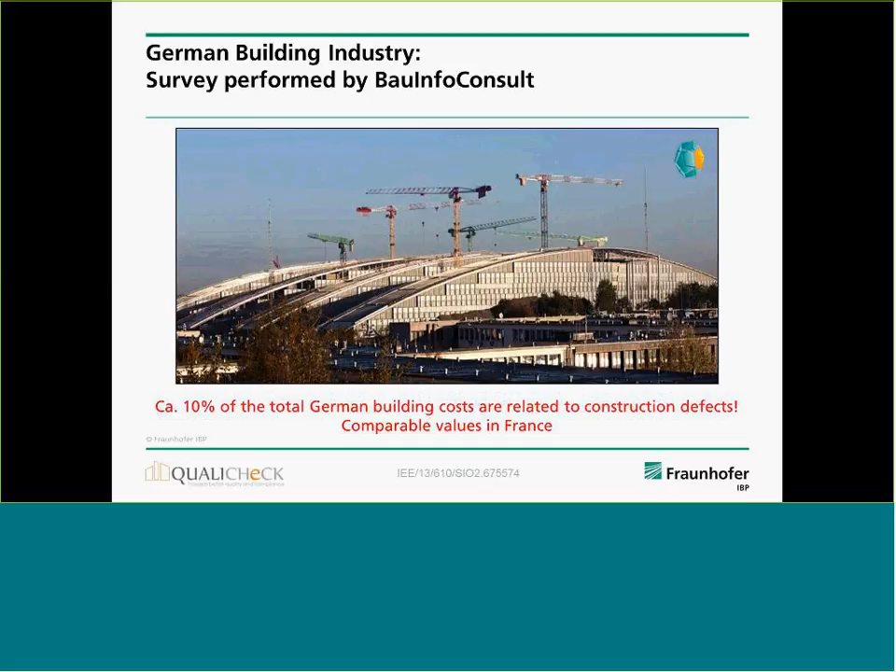This book, this collection of all this information, is structured in a way that we have a short chapter analyzing the reasons for good or poor quality, and then we have the philosophy that Peter just described, how to organize these activities in the countries.

And then we have three parts. One part is technical procedures in the back, then we have the legal procedures, and the third one is handling the compliance. I will, in this presentation, concentrate on part one, the technical procedures.

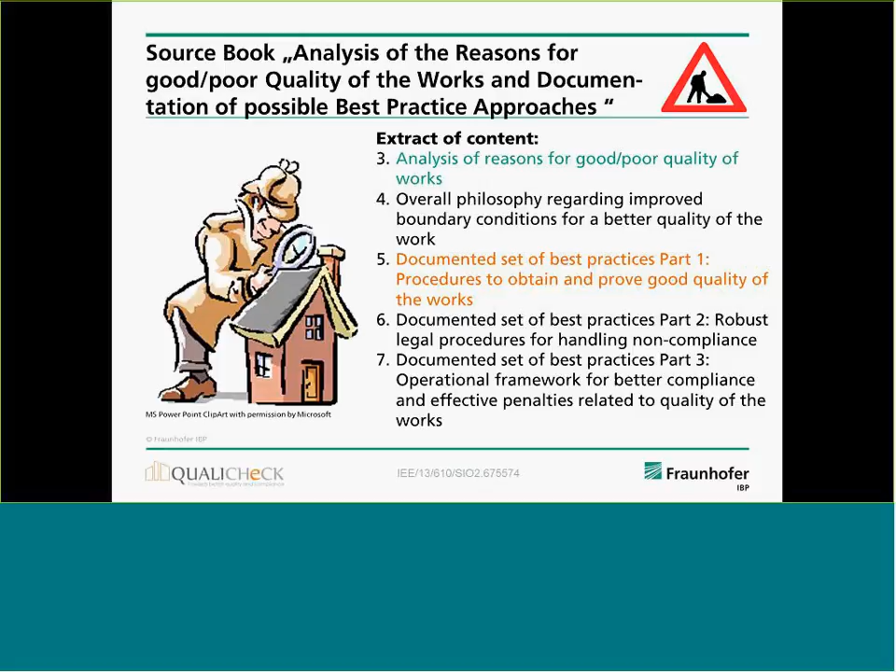Before that, just to give you an idea about the reasons why the problems arise on the building site: we have analyzed 4 main problem areas, related to what happened at the site. Normally, you can expect everyone who is involved will not finish the work with problems.

Normally, each one who will build a building or renovate something will do good quality, but sometimes there's a problem in different ways that does not fit the final results. One big problem we find is that specification is often not so detailed that the people on the building site have a very clear idea what is needed and what is expected from them.

Therefore, it's very important that in the planning stage there is a description of the measures and also a description of the procedures, how you can test the quality of what you have at the building site. Then there's another point, that is a competence issue.

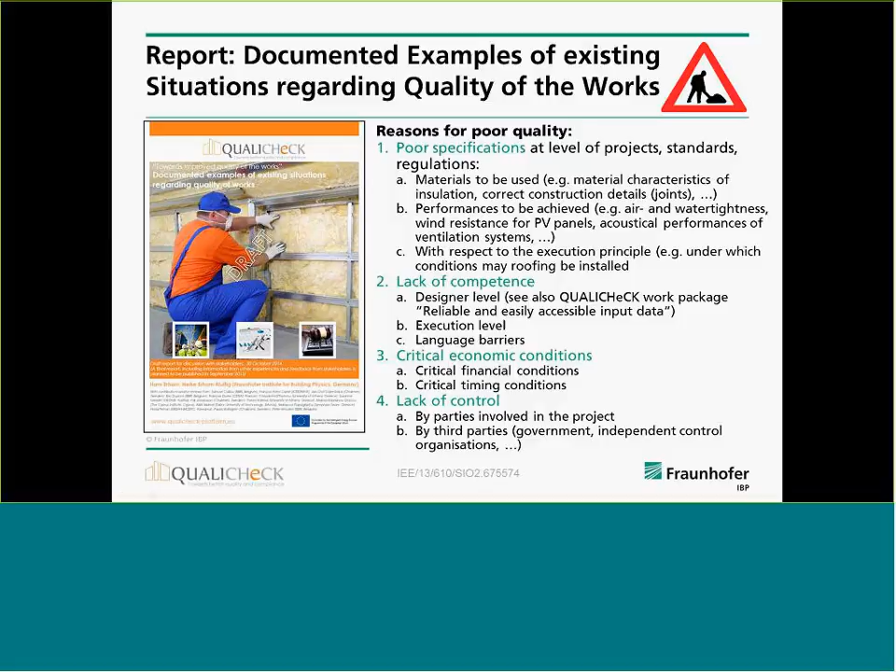Coming to the part of best practice approaches, technical best practice approaches, you can see we collected different kinds of procedures and described these procedures and discussed the experience we find in the member states where these procedures were applied.

That starts with the issue of description of material and work specification, and has different issues. So we find some procedures for how you can trace a process, and consider also some processes where you get a reward if you have a higher quality than normally expected.

That is all documented in the source book, and if you are interested to see more details on how that works, you can follow up this documentation. I will give you a small selection of experience we have documented there.

First, topic one is the issue of description of work specification and material, at least. And there we find a very interesting approach in Sweden.

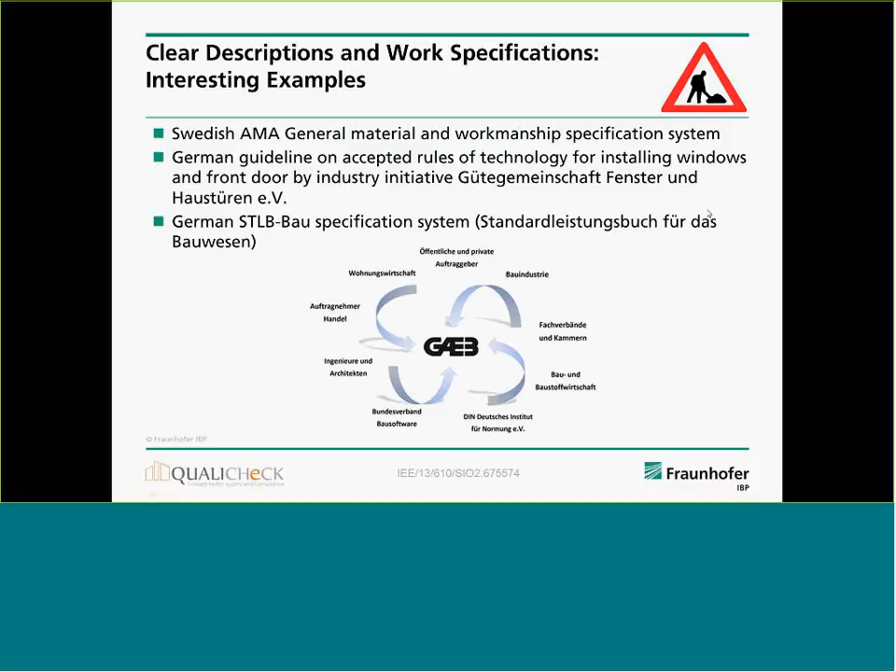Another point is that, as Peter already mentioned, innovation is coming more and more into the market, and installers are often not aware of what has to be done to install it correctly. Therefore it's important that we have training, and at least a training procedure, to train the installer. And believe it or not, I also studied as a Handwerker, as it's called in German, as a ventilation system installer. When I compare what I learned 40 years ago to what is currently on the building site, it is really different. Therefore, in your lifetime, you have to keep learning and training on new technologies.

In Austria, they created a procedure and started training and certification of installers for different technologies. You can see here heat pumps, solar thermal systems, photovoltaic, and ventilation systems. What they do is have a couple of days for each. People who would like certification have to attend, and then they learn all the news on these technologies, and also get the possibility to gain experience installing these things. At the end they have an examination, and if it runs well, they get certified, and they can use this certification in tendering or elsewhere to show they are a certified body.

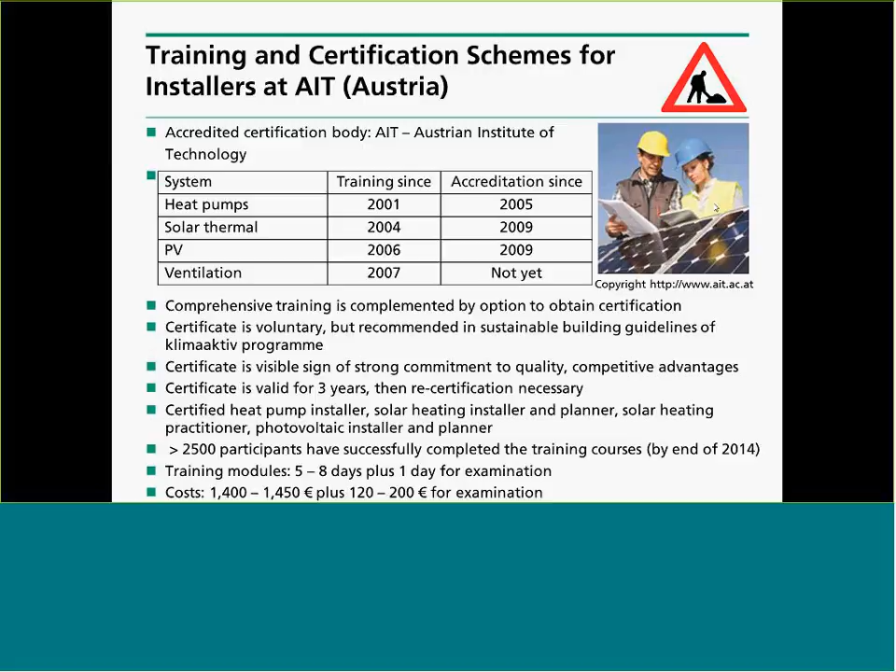There are also comparable things in France. They have also started such a system, and we in Germany are currently also discussing this kind of system, because we find that heat pumps in high performance buildings often don't reach the performance we expected and calculated. And that is not the heat pump itself that is the problem; mostly the problem is the installation process and the planning process. Therefore it's really important that we transfer the knowledge and the right approach to planning to the building market, to the installers.

Another scheme Peter already gave some idea of is a cavity insulation guarantee system. In the UK they have around 10 million buildings with cavity walls, badly insulated, and they discussed what to do to bring this system into the energetic renovation process. But it's not so easy to guarantee that the system really works well. You have to train the installers and make sure the system is installed well, to avoid a wet wall after some years.

What they did is found an agency with the involved stakeholders, and this agency developed a guarantee for the building owners. So if a company applies this installation system to the building, and that company has been trained, they hand over a guarantee to the building owner. If something is wrong after some years, the building owner is guaranteed that the installation will be fixed, so there's no risk for the building owner. The guarantee is long-term, 25 years, and it's registered with this agency along with the registered installers in the UK. They're only allowed to apply the system if they give a guarantee to the building owner.

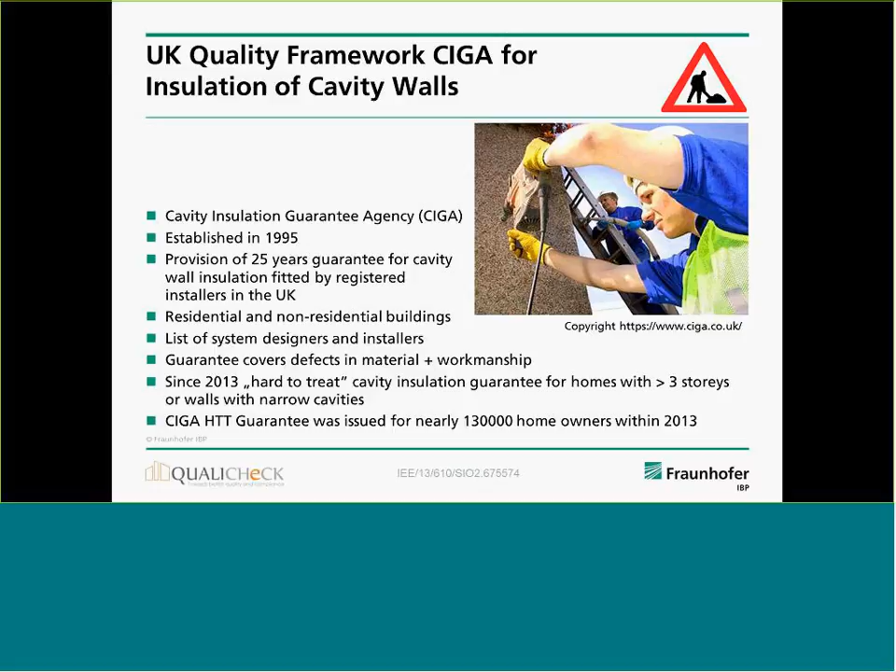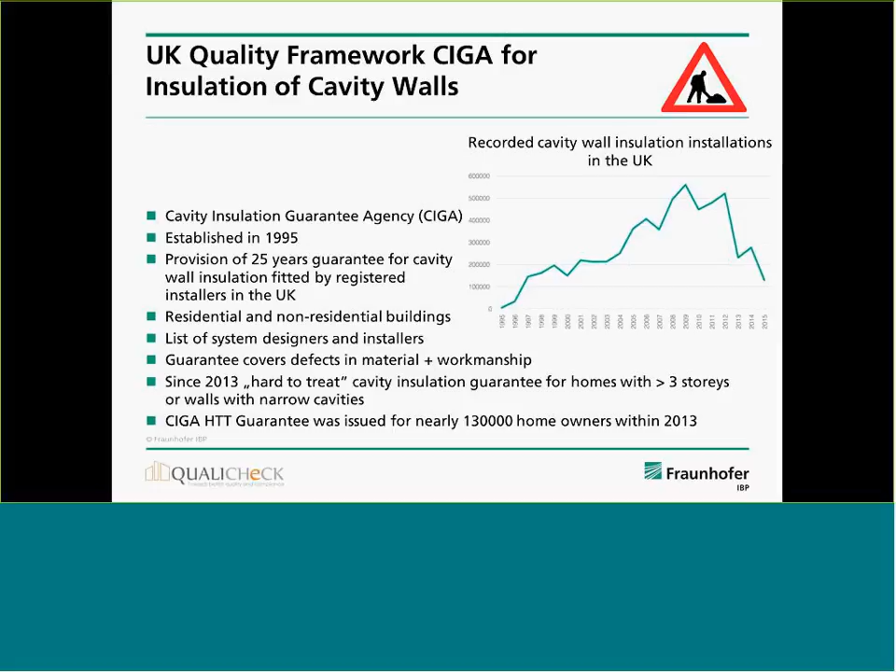This worked so well that after a short period - they established this in 1995 - they came to more than 500,000 installations per year. As I mentioned, they have around 10 million buildings, and if you calculate the covered area, they reached most of the 10 million already within a time frame of 15 years. So that is a very, very effective way to do it.

In Belgium, as we heard before, they have a comparable approach, not with a guarantee, but with all the support around it - a national specification and guideline system, and a certification body. The certification body gives a declaration of confirmation that the system is running well, organizes the procedure for certification of useful material, product approval, and also organizes the certification and training of installers. So the system is really comparable to the British system, and there's a growing awareness and growing market in Belgium to apply it.

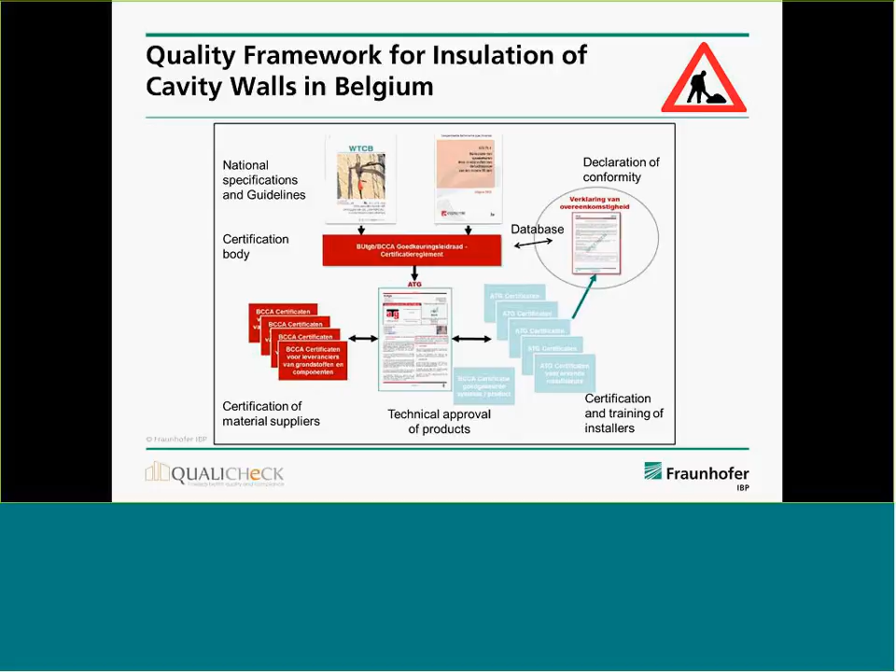Another approach we reported is in Germany. We started three years ago a so-called contractor's declaration. The idea behind it is to avoid costs for improvements and costs for checking different things. Our government decided that each contractor has to declare that what he installed is in line with the German energy saving ordinance. That means the contractor has to be really sure, when he signs, that he followed 100% of the energy saving ordinance. In case there are problems, this contractor declaration will be used in court, and the contractor will have a problem.

We did this for different levels - for envelope elements, for space heating and hot water systems, and also for cooling and ventilation systems. If contractors make a wrong declaration, there is an infringement system in the back, and it's clearly regulated what to do and what the contractors have to pay.

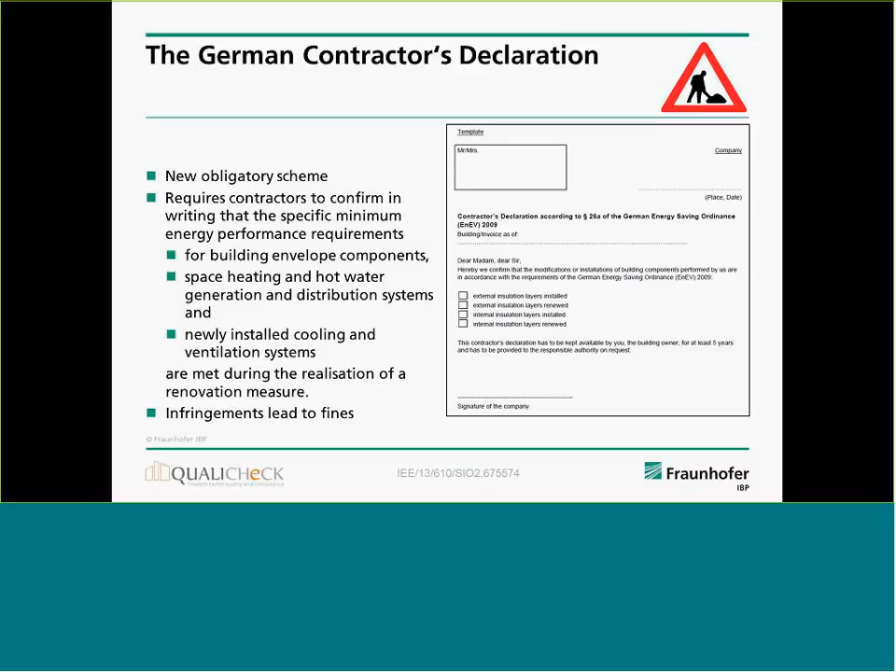We found comparable activities in Austria. In Salzburg, they have a system more advanced than ours in Germany, but with the same idea: at the end of the installation there should be a declaration from the contractor, stating what is reported in the energy performance certificate versus what is actually installed at the building site, so the building owner has a clear view of what has been done with the retrofit or installation measures.

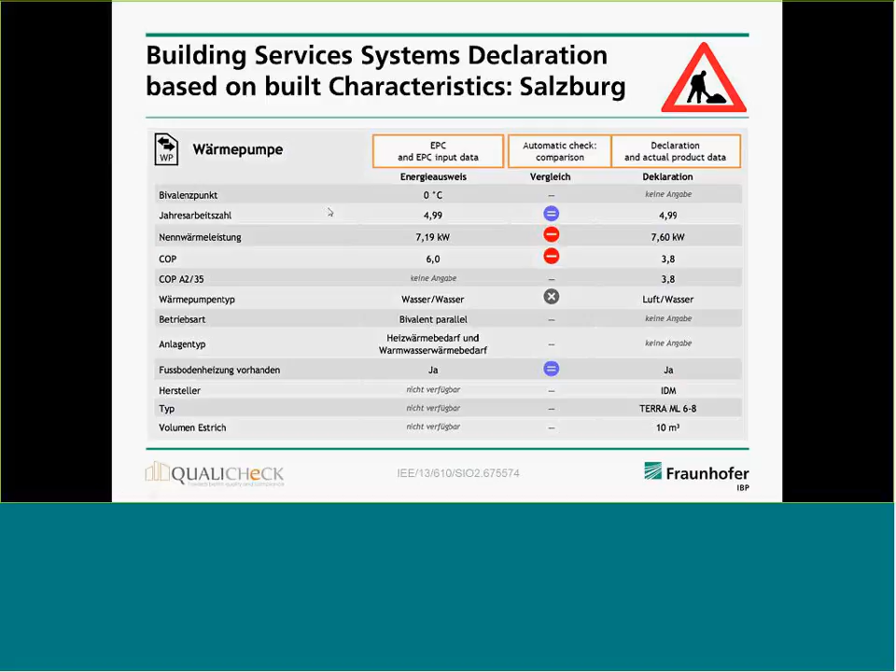That was just an overview, to give you an idea what is in the documentation and what kind of material we collected. You can see here the two products we delivered in this project. The first is a collection of the existing situation regarding quality of work in the field, including documented examples of already applied quality work procedures.

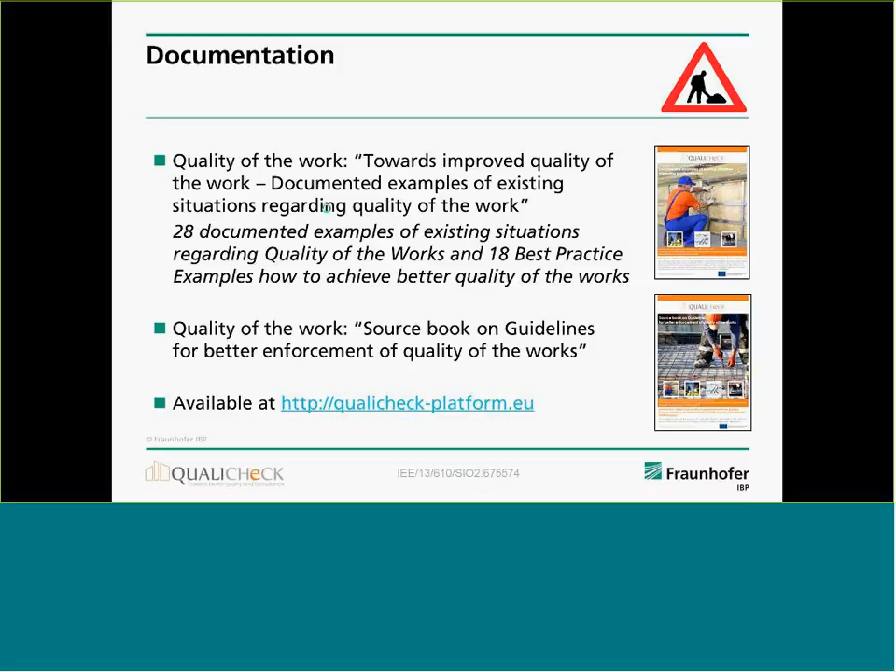The second, just finished now, is the guideline - a collection for better enforcement of quality of work - which you can find and download on the website for your use. That is what I would like to show you, and I invite you to use the material if you're trying to install some kind of comparable activity in your country. Thank you very much.